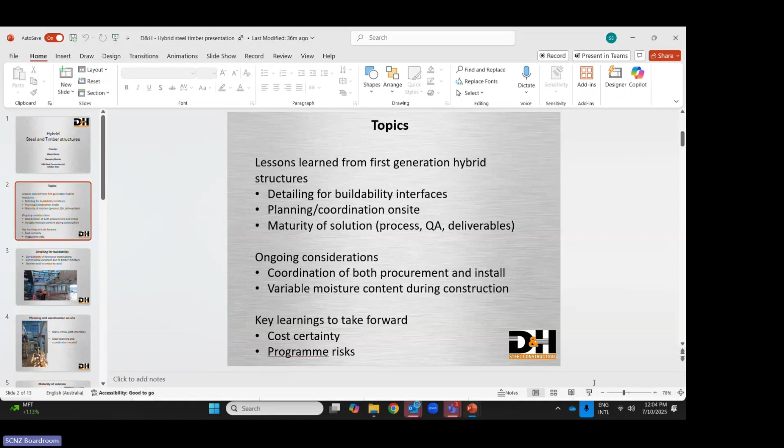So I'm going to touch on some of these areas - lessons learned from first generation. I'll talk about buildability, interfaces, something about planning on site. I'm going to touch on some learnings around the maturity of the industry and where we're heading, a bit about coordination, and looking forward at some ongoing considerations. Moisture content is one of those, and how do we take these key learnings forward.

Compatibility of expectations was and is one of the big things. It really needs careful consideration when planning a project, and more particularly as you're detailing. There are quite significant differences in that expectation, so it needs to be clear, talked about and discussed on how to deal with it. One of the things we've found - and I'm going to show you three examples of projects we've been involved in - is a key difference in dimensional variance that occurs through weather, particularly moisture, which translates into trying to come up with good buildable details that allow for a bit of variance and a changing variance.

One of the things we've seen change quite a lot is a bit of a demarcation between what we describe as steel-to-steel connections versus timber-to-steel connections.

Some of the manufacturers now are offering some of those connections as part of their timber package. It's different from different manufacturers, but some now supply their own timber to timber connections.

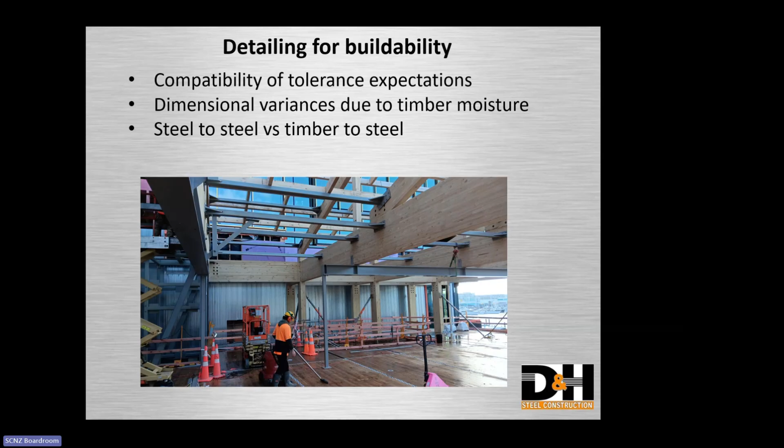So it's about understanding that at the start, who's designing which elements and more particularly who's detailing each of those interfaces - timber to timber, steel to steel, timber to steel. These are the three generic areas that really need a lot of thought from a detailing and buildability perspective.

Along with that is the planning and coordination for on-site activities. Each of the projects we've been involved in has had many critical path interfaces. They're all true hybrids - even though they may appear to be largely a timber building, there is still a high content of steel elements and components, so all of those interfaces need careful consideration.

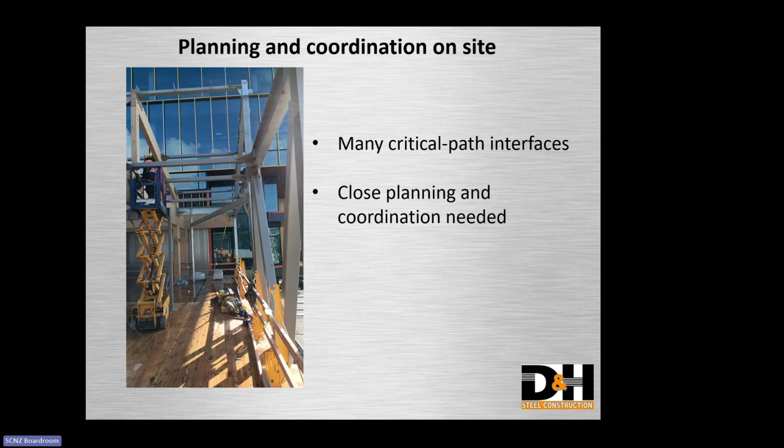From a construction perspective, and certainly a main contractor's perspective, where he's herding the sheep if you like, it needs close planning and careful coordination. Most projects ended up with various tools to deal with that - the starting point being potentially a color-coded set of drawings that clearly defines which manufacturer or contractor is supplying and installing the steel components and the timber components.

Some lessons learned that have been reoccurring is there's a maturing of these solutions, and one thing we've noticed as a significant step ahead is timber manufacturers becoming contractors. In other words, more and more they're offering added value - not only supply of timber elements, but also in some cases supply of connections and in some cases also erecting the structure.

I can say with pride that our steel industry is quite a mature industry, so there are very clear processes that follow. So there are some challenges to get onto the same page around how we deal with control, change management and control.

I know especially changes through detailing. The detail that I've circled in that picture was one that from a steel perspective, we weren't aware it even occurred. So there's a bit of a mismatch there on expectations of what we were each building.

I say eyes open because you actually need to be really holding hands. There are things that one party might not think are so important and yet might be critical to the other. So it's very much a team effort, and clear, concise communication is just key.

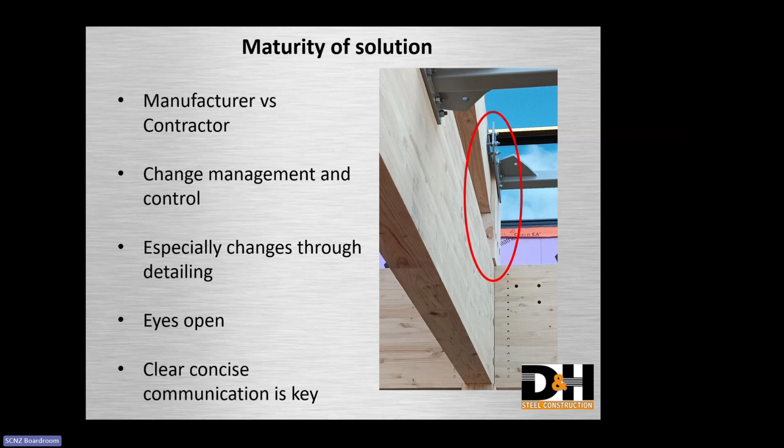Once there's a set of design documents there, having those demarcations and the clear scope and expectations is what I mentioned - clear scope, definition, demarcation, that's really, really important. And we've got a much better feel of how that looks now.

Part of the consideration around this - how do you pull two primary structural members or materials together - is the whole thing around lead times, different deliveries, different phases, using the same terminology.

There's very different skill sets needed for the two components, steel versus timber. And what we've found on many of these hybrid projects, you actually need both on site most of the time. They're so connected and interconnected that you need those resources available to ensure a streamlined, flowing construction sequence and process.

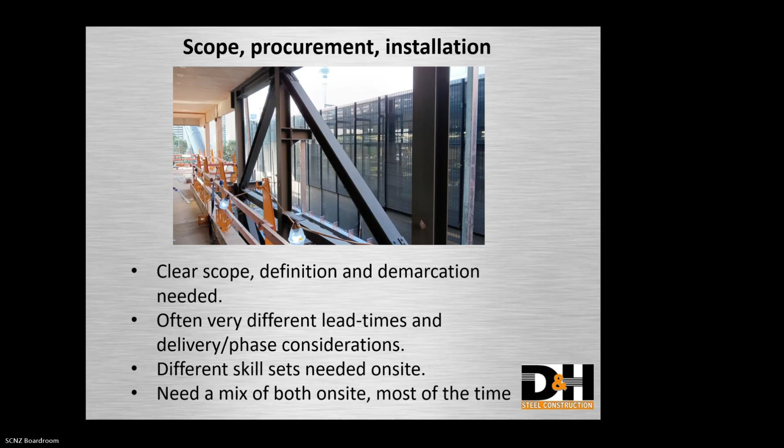One of the things we've learned a lot about is moisture content and how that affects timber on site, and also much greater appreciation that it changes quickly with weather. So it's imperative that some of the connections, if there's a consideration around moisture content, have a limitation before certain things can happen.

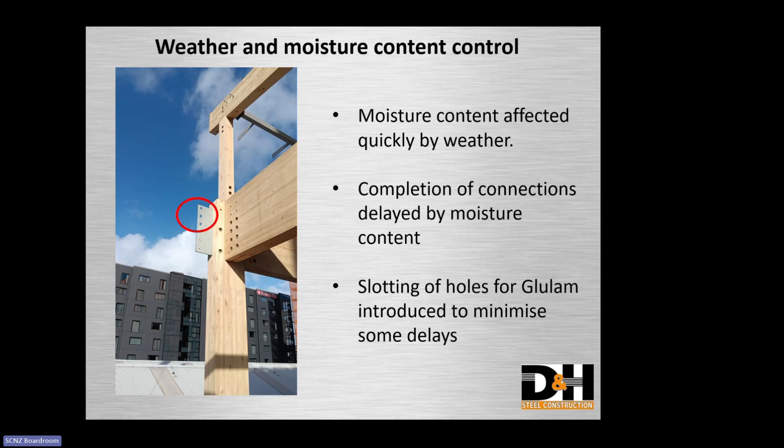For instance, the connection I've circled there couldn't be done unless the timber was within a certain moisture content. So partway through the job, they introduced slotted holes just to try and make that less of a critical hold point. So some of those things are really important to understand at the beginning of the project, because the critical nature with which the two trades work together, it needs to be seamless and trouble-free.

So I'm just going to quickly touch on 3 examples. This building, all of these have been constructed. In this building, the coloured items are steel. I did a bit of a cross-check around how that looked from a project perspective. The steel cost there equated to about $110 a square metre, which is a pretty significant cost. Even though it doesn't look like there's many members, there's quite a bit of detail in it.

At the beginning of any of these concepts and projects, I think it's really important everyone has their eyes open and expectations clear, because as we all know, budget and budget constraints are critical, and no one likes surprises. So these things are now becoming much more predictable and expected, and therefore better quality budgeting, having that knowledge.

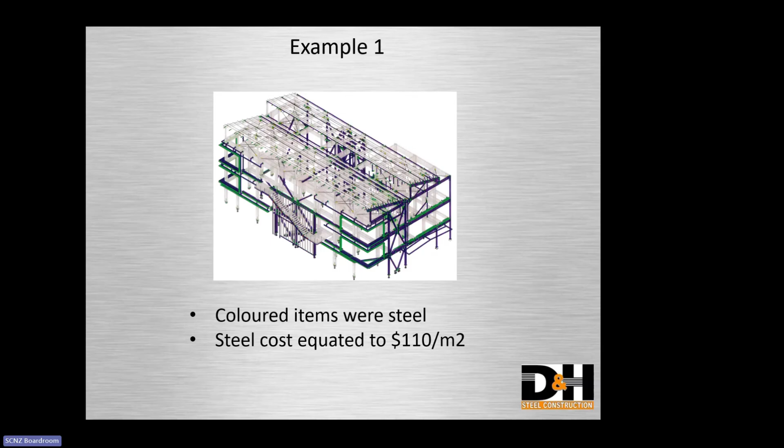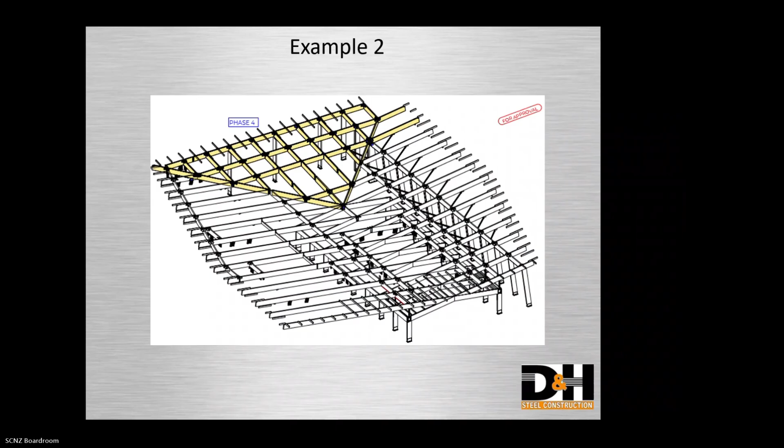This is another example. Actually, all of the members you see there are timber, largely, predominantly timber. And these are the things you can't see. In this case, it had extremely complex steel connections, very expensive details to fabricate, and just the critical nature of how everything fits up. They needed very, very high quality fabrication to fit up on site. So as a consequence, very expensive.

Now, this is first generation. Things have moved on. I think people now appreciate that there is this hidden cost that might not be apparent at the beginning. So there's a much greater awareness around more efficient connection details, avoiding this kind of extremely expensive component items.

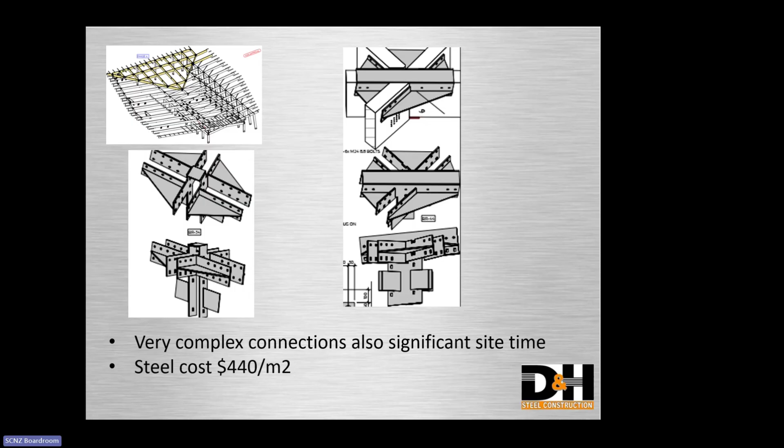This is the third one. Again, a real project, a little bit different because it's quite a special area. It's big, wide span trusses, a big open area. It had a very significant amount of steel in it, also a significant amount of timber. So it was a true hybrid.

Again, I think everyone was a little surprised at the final cost, and when you start trying to boil it down, in this case, it had substantial steel supporting the timber, even though now if you look at it, it appears to be a solid timber building. So I think there's a few lessons learned out of this one, that that's potentially not the right mix.

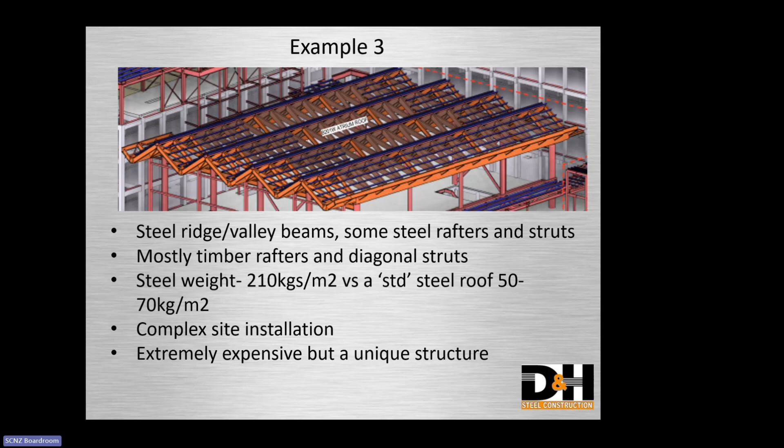So just to try and summarize quickly, first generation hybrids have provided some clarity on the pros and cons and the best combinations of materials. I think one of the recognitions we have as a steel industry is that it's very much about using the best material for the application and the use, and timber definitely has a place in the market. Our role is to try and assist where we can in making that a really good solution.

Risk is much better understood. I think we're kind of 5, 6, 8 years down the track now, and there's much greater clarity around how a hybrid building will look and how it can be built, which leads to much greater certainty on cost and programs. And clearly there's been development, and there's certainly improvements and more cost-effective low carbon hybrid solutions are evolving, which is what Alistair's going to be pointing to in terms of one consideration.

So those are the key points we've taken from it. The market is certainly moving ahead. There's absolutely, hybrid construction is here to stay. So it's about trying to make sure that you use the optimum pros and cons to get that best mix.

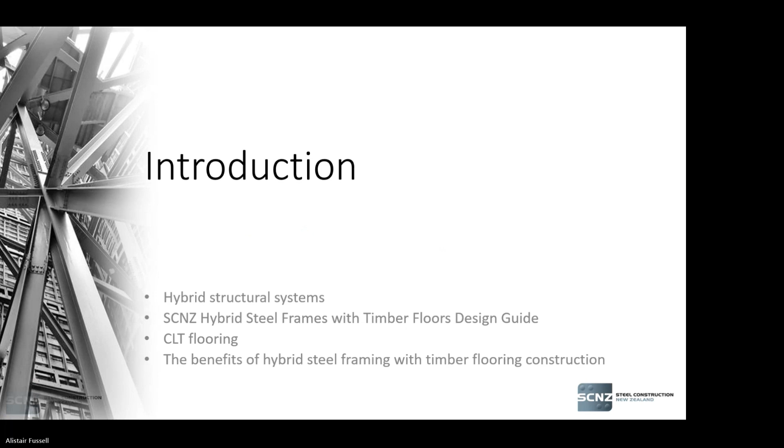Ah, there it is. Okay, so in terms of introduction, when we talk about hybrid structural systems, it's a bit of a generic term. Essentially, we're talking about combining one or two or more construction materials, and what we're trying to do is optimize the strength of each material to come up with an efficient and, particularly these days, a sustainable system.

So with timber and steel, we might be trying to take advantage of the strength and stiffness of a steel member while getting the aesthetic values of a timber floor, and also the advantages of the reduced weight of the floor.

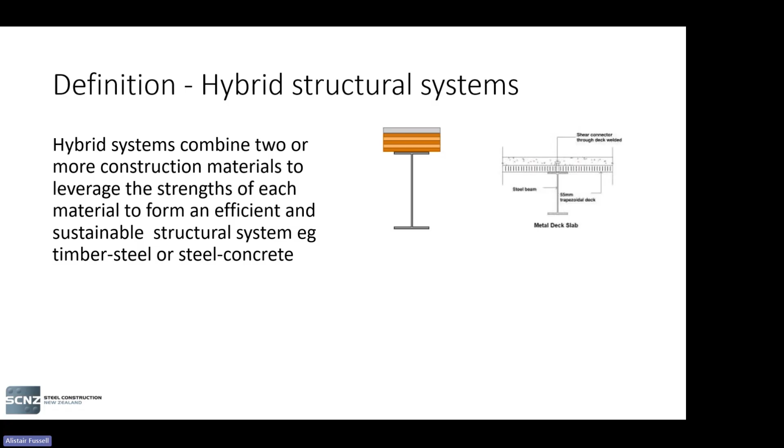With a steel concrete composite floor, what we're trying to do is take advantage of the fact that steel's very good in tension and concrete's good in compression, and if we put the two together, we can come up with an efficient floor.

Darren's mentioned that we're currently developing a new design guide called Hybrid Steel Frames with Timber Flooring. The typology we're covering here, and Wayne's already alluded to this, is that when we talk about hybrid timber and steel, there's lots of different options. You can have timber floors, beams and columns, but only steel braces in the building. As Wayne has shown with some of the jobs, there's a mixture of steel and a mixture of elements in it.

So the typology we're covering in this guide, which we think is a practical form of hybrid construction, involves having a structural steel skeleton - your beams, your columns, your braces - and you put a timber floor on top of the steel. We think this is a practical way to decarbonize construction, and as we'll discuss, it can be a cost-effective and efficient way of building.

The design guide we're developing - we're grateful to the American Institute of Steel Construction. They developed Design Guide 37, and they've given us permission to use their guide as a basis for our own. Obviously things are a bit different in New Zealand, so we've had to rework it for our own context. We have different building regulations, different codes, material codes, loading standards, and the building practice in this country is different than it is in the US.

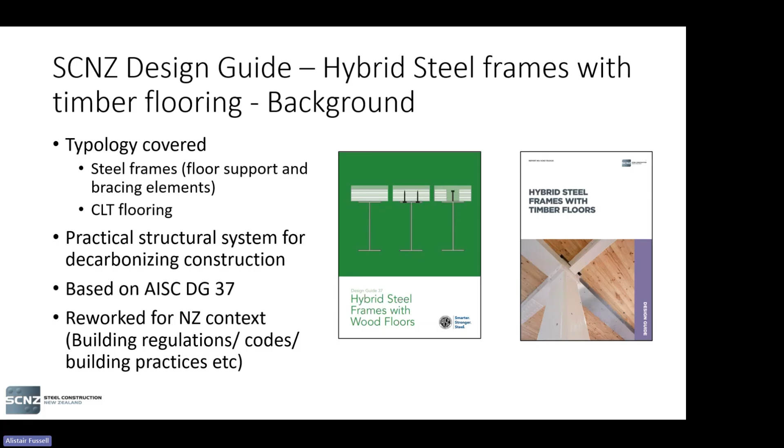So in terms of the guide, why did we develop it? Firstly, we really wanted to try and facilitate the adoption of this type of building typology. So what we're trying to do is help designers who perhaps are more experienced with structural steel design than hybrid construction, putting front and center the matters they need to give consideration to, particularly up front, if they want their designs to go well.

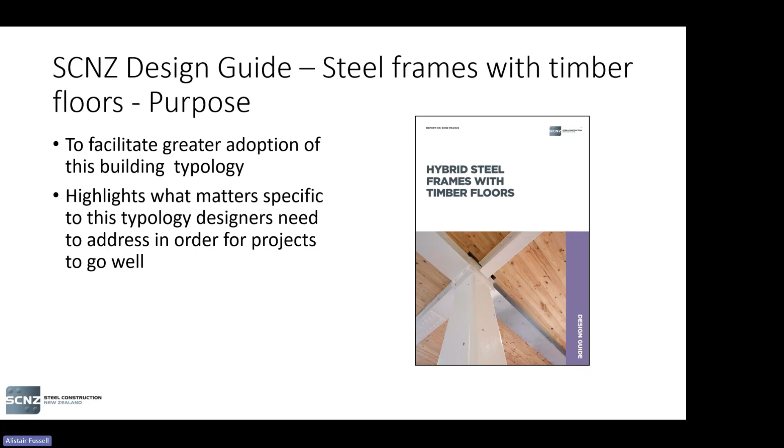In terms of its development, we began our journey of developing this guide earlier this year. We've engaged a range of consultants with specialist expertise to help us develop our guide - structural and fire engineers, acoustics people, sustainability experts. We've convened an expert panel of structural and fire engineers who've already undertaken a review of the first draft. The game plan is that, all things going well, probably the middle of next year we should be publishing this guide.

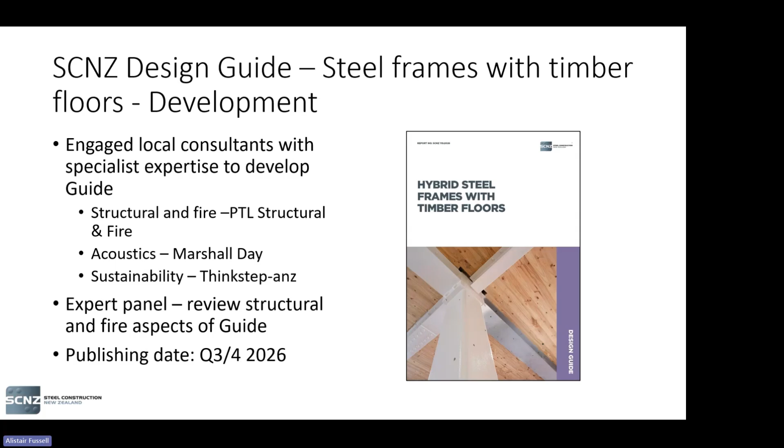In terms of this guide, this gives you a bit of an idea of the content. We give a bit of an introduction to mass timber construction, and talk about hybrid steel frames with timber floors, giving some examples with case studies we've developed. We're also talking about some of the advantages of this type of construction. We focus on structural design, and one of the really important areas of designing one of these mass timber floors is the design of them as a diaphragm, which we'll talk more about as we go on. Fire is an important consideration, which we cover in good depth as well.

Acoustics, sustainability, and we've also got input from builders and fabricators who've got some experience with hybrid construction, sharing some of the learnings from their experience of this type of construction.

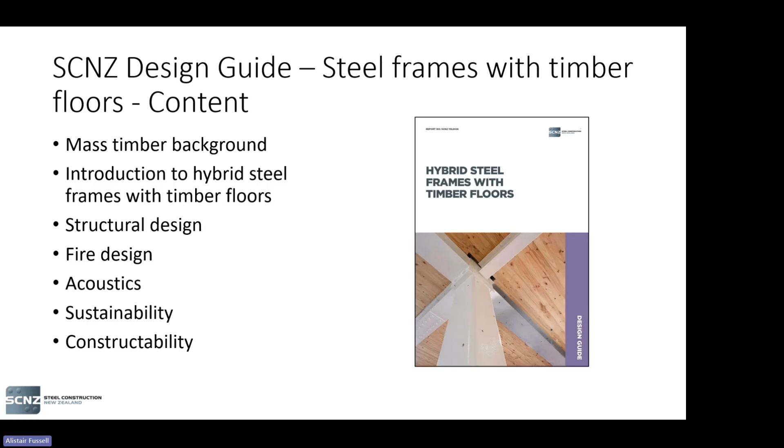When we talk about hybrid construction using timber floors, what we have in mind with this guide is the use of cross-laminated timber panels. These are panels made up of a number of plies.

They come in different configurations. You can get them in 3-ply, 5-ply, 7-ply, and different manufacturers come up with their own thicknesses of these plies. So even for a given number of plies, you can end up with a range of panel thicknesses. A 3-ply can span up to 4 meters, and once you get to 7-ply, they can span between 5 and 7 meters.

I suspect that won't be a practical limit - floor vibration would start to become an issue if you were pushing them out that far. But in theory, that's how far they can span.

One of the features of a cross-laminated panel is that the plies are orientated at 90 degrees, alternating direction, so they tend to have strength or spanning capability in 2 directions. They can be made in quite long lengths, between 12 and 18 meters, and up to between 2 and 3.5 meters wide. So really you're more limited by transportation - generally, once you get beyond 18 meters or just over 3 meters wide, you'll need a pilot escort for your vehicle to transport these.

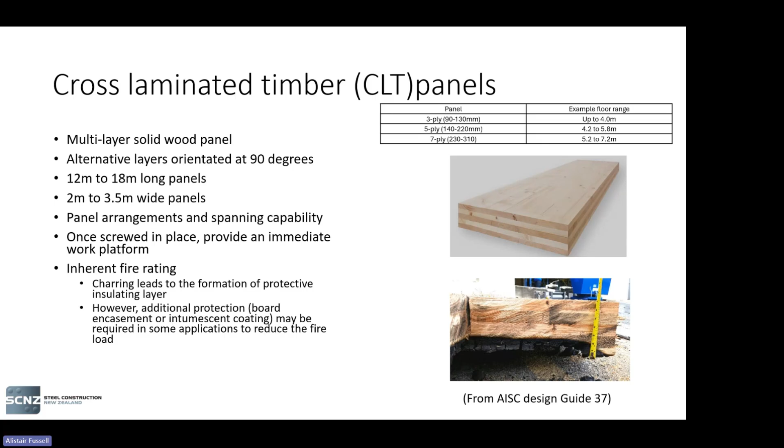So what I want to do now is just touch on some of the reasons or the benefits of this type of typology that we're talking about in the guide, why we think it's a good solution.

The first one is aesthetics, and I'm sure I'm preaching to the choir here with architects. You're well aware there's a growing interest in biophilic design, and the way we're seeing that is more natural elements being incorporated into the built environment, with timber being a significant part of that.

One of the things you can do with this type of floor, as you can see in the example here on the right, is actually expose the floor panels and the steel beams with minimal additional architectural finishing. You might just need to give your steelwork a nice coat of paint, and think a little bit about how you treat your surfaces so it looks like there's some thought gone into the layout.

One of the big advantages of using steel beams is the spanning capability - you can easily get 8, 10, 12 meter long floor beams if you use steel. Conversely, if you're going to use timber beams, mass timber beam/post construction, they can become quite inefficient once you get spans greater than about 6 meters.

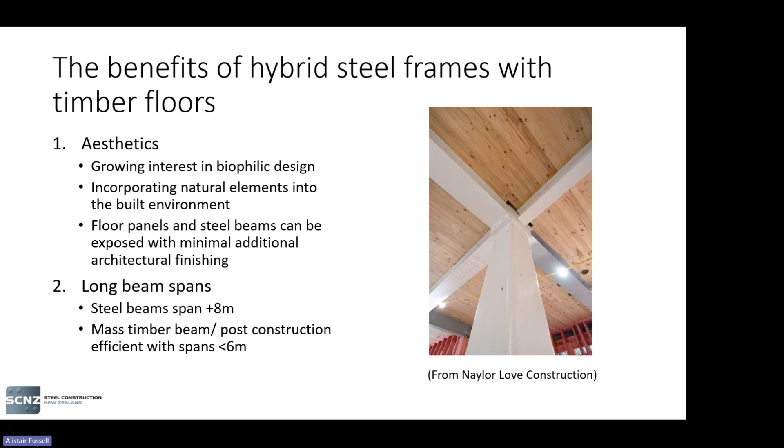This type of construction has sustainability benefits. The CLT panels obviously have low embodied carbon, and the structural steel also has a good sustainability story.

We're seeing increasing adaptive reuse of buildings. Often buildings become functionally obsolete long before they need replacing or demolishing because of deterioration. So when you use a structural steel building with long spans, it gives greater flexibility if there's a change of use. Also, structural steel buildings can be readily strengthened if you want to change the floor loading or add extra floors.

It's relatively easy to weld or bolt new structure to an existing structure. Steel is also readily reusable, so essentially a steel building is a spare parts warehouse for the next steel building, and there are initiatives now to help facilitate that in the future, in the next 100 years or so, when these buildings come to the end of their life.

One of these initiatives is the Steel Passport. This is where they're developing systems to capture information about the steel that's gone into the building—its grade, its mechanical properties, what coatings were put on it, and its sustainability properties—so that in the future it's available to be sold and reused.

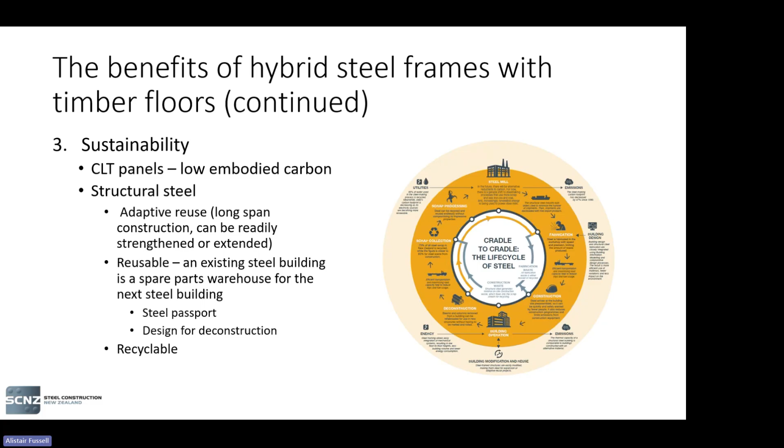The final aspect of structural steel sustainability is that, unlike a lot of other materials, once you get to the end of life of the structure, there's a ready market for scrap metal. There's a very high recycling rate with structural steel, and it has good commercial value. It's used again in electric arc furnace steelmaking processes to create new steel, which has a much lower embodied carbon value than creating steel from virgin iron.

One of the other big benefits of using structural steel beams is it's much easier to integrate services into the depth of the beam. With structural steel, you can put pretty large penetrations into the webs of the beam—you can see an example from one of our case studies with circular penetrations. If you have to pass services under the beam rather than through it, you end up with increased floor depths, which increases the height of the structure and the amount of facade you have to put on the building.

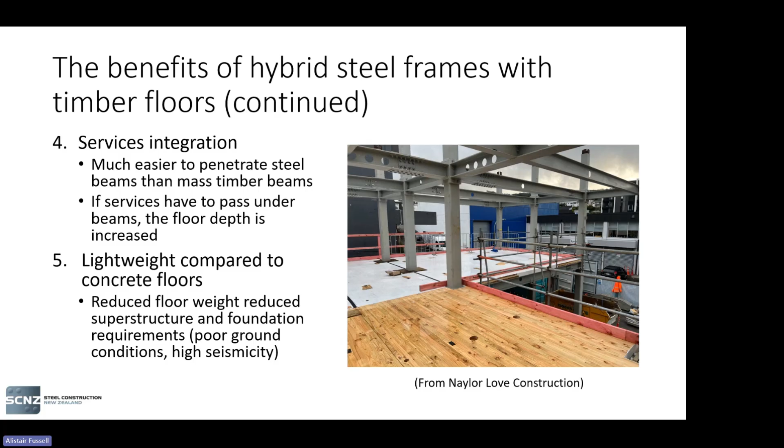Another plus of this type of construction is that a timber floor is quite lightweight compared to a concrete floor. If you can reduce the weight of your superstructure, the requirements for your beams, columns, foundations, and lateral load resisting systems are reduced. This has big advantages if you've got poor ground conditions where foundation work is expensive, or if you're in a region of high seismicity, where extra structural weight is a liability as your earthquake loads will be a lot higher.

You also get the benefits of construction efficiency. CLT panels and structural steelwork are prefabricated systems, both manufactured in factories using automated equipment. They use 3D modeling, which gives the inputs into computer-controlled CNC equipment, so you get all those efficiencies.

When you set yourself up in a factory, it's easier to control the environment to get the quality you require. You can set things up so it's more efficient, and you can do it not only easier but safer in a factory than on a construction site. Once the fabricated product gets to site, it's very quick and easy to erect.

CLT offers significant construction efficiencies compared to a traditional floor. Imagine dropping in an 18-meter long panel that's 3 meters wide—that's a lot of floor area covered in a very small time. If you were to replace that with timber joists at 400 or 600 centers, adding blocking, flooring, and screwing it down, it's way quicker to just drop the panel in.

Structural steelwork is just like a giant Meccano set. The steelwork comes to site either as individual members or as fabricated components, and it's bolted together on site. These days we don't get much site welding, so it's a very quick process.

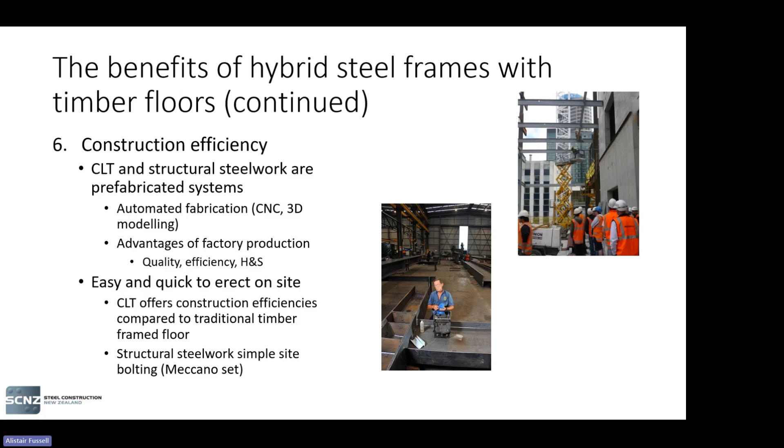So that's really just a bit of an introduction to our guide and to the hybrid typology that we're suggesting has a lot of merits, and we're encouraging designers to think about utilizing it. What I want to do now is go through some of our case studies, share with you some of the drivers for those projects, why they decided to use the typology they did, and also share some of the challenges or lessons they've taken from their first experience of this type of construction. Before I start, I want to acknowledge the engineers and the builders who helped us with these case studies, not only sharing information but also images and drawings of these projects.

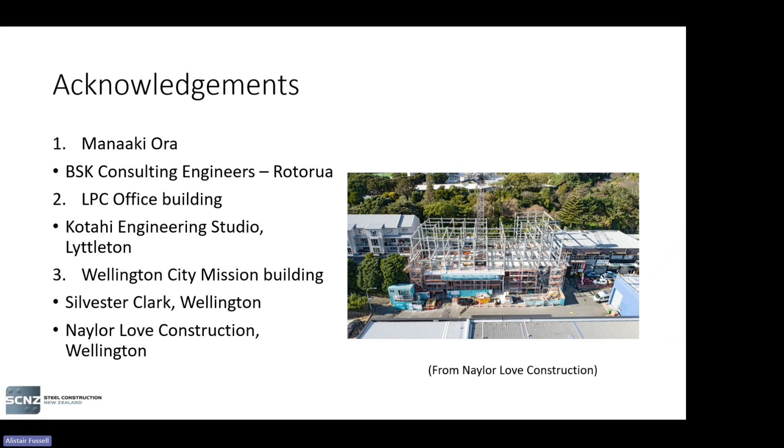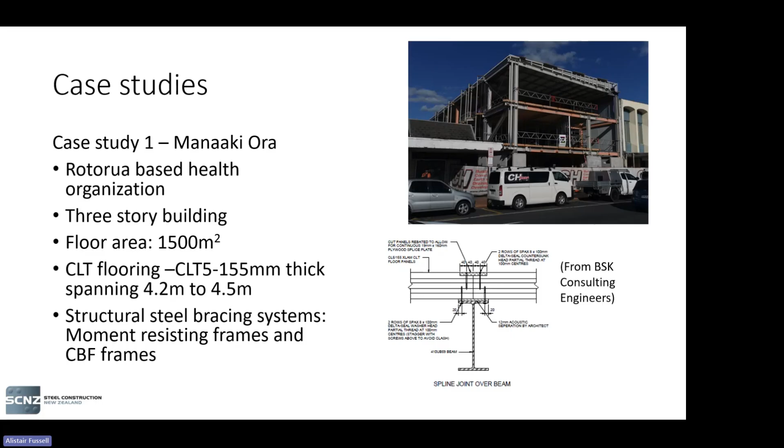So the first case study is the Manaaki Ora project in Rotorua. This was for a Rotorua-based health organisation, a 3-story building with a floor area of 1,500 square metres. They had a 5-ply floor, 155 millimetres thick. The structural bracing system, as you can see in the picture, had concentrically braced frames running down the side of the building, and steel moment frames in the cross direction. The CLT flooring was supported on top of the steelwork - you can see in the diagram a cross-section through the beam and floor, showing spline joints over the beam. They also used half lap splices in the middle of the floor, which I haven't included in this diagram.

In terms of the drivers for choosing a hybrid structure: it was a challenging site, with difficult geotechnical and geothermal conditions. So it was a big plus to be able to reduce the weight of the structure and make things easier for themselves. They were keen to use a natural product in the floor, and wanted the construction efficiencies of a prefabricated element, as opposed to constructing a traditional timber floor. They really liked the idea of combining the warmth of wood with the strength of structural steel.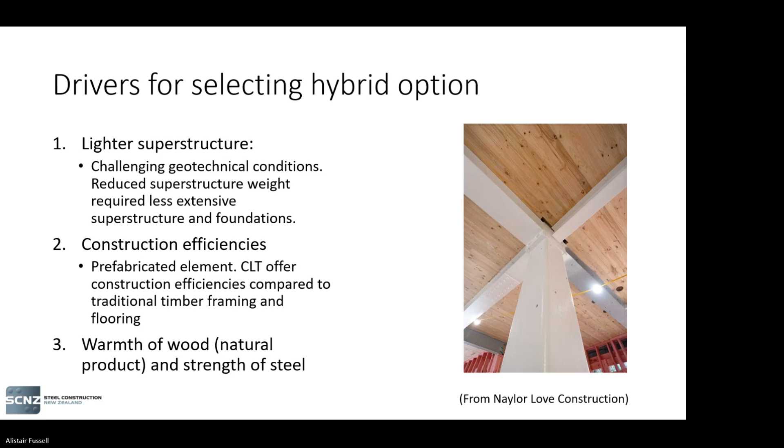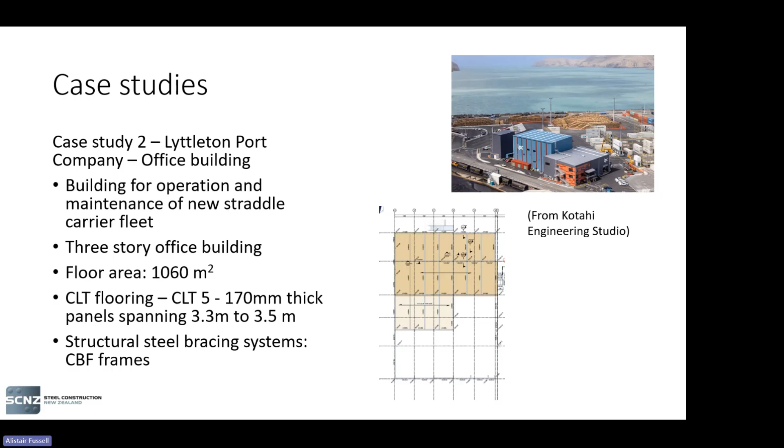The second case study is an office building for the Lyttelton Port Company. They were building a new operations and maintenance building for their new straddle carriers, which could now lift and place containers 4 high instead of 3. So they were getting greater capability without needing new land, and needed a new building to service that. They also constructed a 3-story office building, just over 1,000 square metres, with a 5-ply floor. In this case, they had concentrically braced frames as the primary lateral load resisting system.

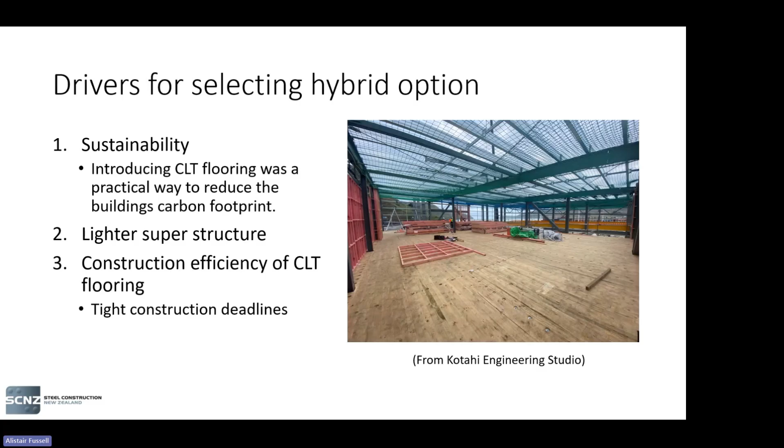So why did they choose a hybrid option? The port company was keen, as part of their sustainability agenda, to reduce the carbon footprint of their building while coming up with something practical to build. The reduced weight of the structure made a difference to the design, and they were keen on the construction efficiency of CLT. Like most projects, they had tight construction deadlines, and they felt this would offer that advantage.

The third case study was from Wellington - the Wellington City Mission project. This was a community facility serving a number of functions, a 5-story building, bigger than the other projects at over 5,000 square metres. It included a 5-ply CLT floor, but unlike the others which used brace elements, this used a 2-way moment frame. Part of the reason for this was that brace frames had quite high uplift loads, making it difficult to design the foundations. So the 2-way moment frame really suited their project.

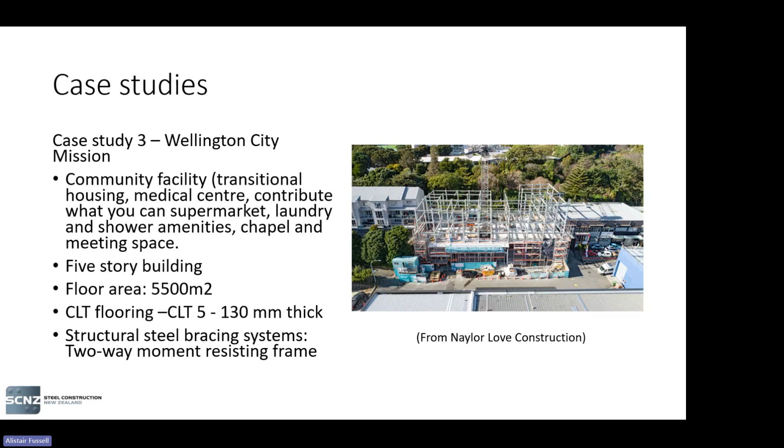The reason they went for this hybrid option was that the timeframes were really tight on this project. When they first started, they had a few buildings they were going to upgrade and do some refurbishment work on. Very soon it became apparent to the designers and owners that there would still be a lot of limitations even after this upgrade work, and they probably weren't going to get a great outcome. So they ended up pivoting to a new build.

They had secured government funding under the Shovel Ready program, but they had to start by a fixed date to get the funding. And to avoid a new resource consent, the building had to stay within the consented envelope. The structural engineers had to come up with a new structural system that would work within the confines of the developed architectural layout, because that wasn't going to change anymore.

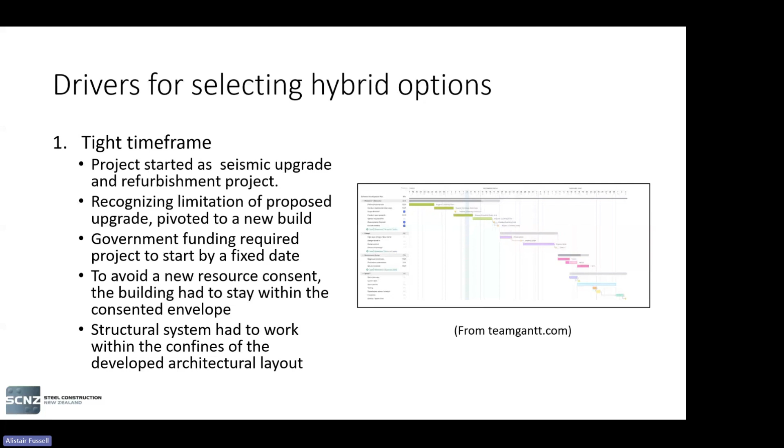The other driver was construction efficiency, which came down to this tight timeframe - they liked the advantage of a CLT floor. Weight was also important, as it was going to be tricky to make the foundations work with a heavy structure. The other big plus was that the steel beams were a lot shallower than they would have been as a mass timber beam, which was really important for keeping the building within the envelope they had a resource consent for.

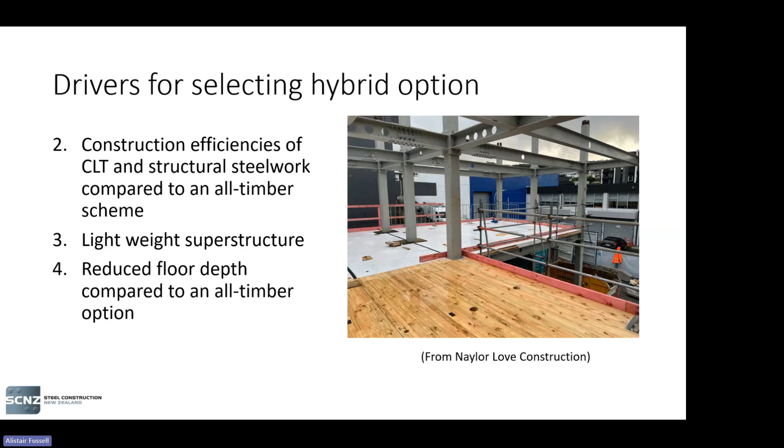Now I'd like to draw out some of the lessons that this first generation of designers has learned from their experience with these types of buildings. I've essentially morphed them all into one - I'm not going to list them by building. Some of these came up in all of them, some might have only come up for one project, so I've just selected a group of them.

The first lesson was that they certainly recommended the use of a federated building model - a combined model of the structural steelwork, the CLT panels, and your building services. What they're saying is that it's much easier to build a digital building and detect your clashes rather than send the job to site and find problems. You lose a lot of the advantages of prefabricating your building if you find on site that you have to retrofit where you've got a problem.

You might have overlooked that you had, for example, some connections on top of the steel flange and you didn't route the panel. If you're craning a panel into position and suddenly find you have a problem, you've got all the delays of having to site route, plus the hook time and everything. So you really want to try and sort it all out in your model before you even get to site.

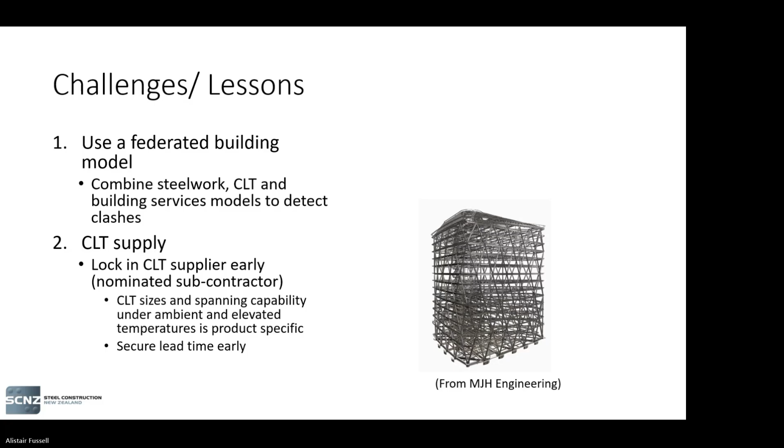Fireproofing is obviously important for all types of construction, but there are particular issues to consider with mass timber and hybrid structures. One designer rightfully noted that the behavior of hybrid buildings in fire is an evolving science, so you really want to get your fire engineer involved early.

One of the key things you have to do with these types of floors is prevent heat and smoke transfer through the floor. Now this is a bit more tricky when you don't have a concrete topping. In the US they do put concrete toppings on floors, so you don't have the same issues of having to be so careful in preventing smoke and heat transferring through the floor.

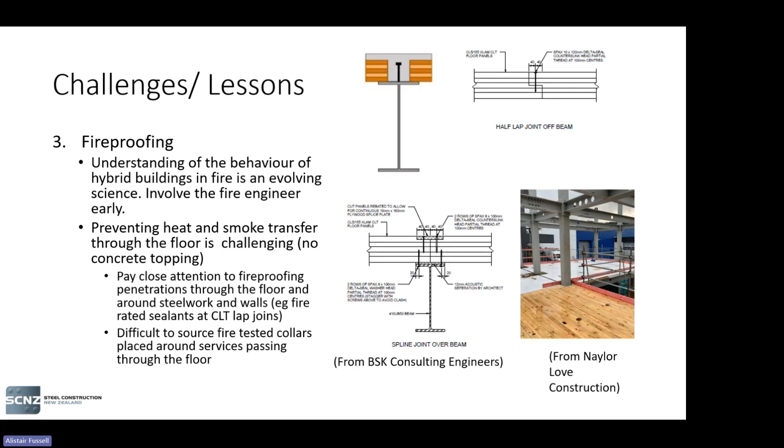So all the joins with the CLT floor had to have fire rated sealants in them. They needed to have fire rated collars go around the services penetrations through the floor. One of the engineers reported that it was difficult to get fire-tested collars to pass through the timber floor. I don't know if that's changed, but that's just something to be mindful of.

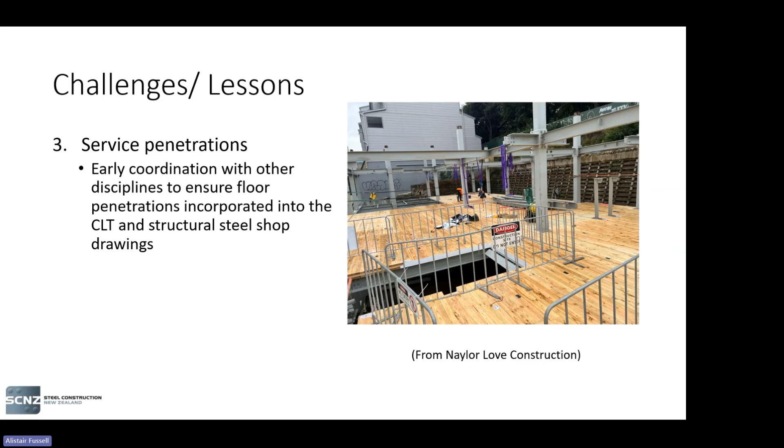The other lesson there is around service penetrations, and really the lesson is that you need to get early coordination with particularly the services engineers to make sure that the floor penetrations are incorporated into the floor, and beam penetrations are incorporated into your shop drawings. It's so much easier to put the service penetrations on in the factory than it is to retrofit and have to put penetrations into your structure on site.

The building code has requirements around the transmission of airborne and impact sound transmission, and so really one of the requirements there is that you have to resolve your acoustic issues early. You have to recognise that some form of acoustic separation layer between your floor and your steelwork, or some sort of floating floor, is going to be required.

And then obviously this has structural and architectural implications. You add these floating floors, you add seismic weight, you increase the floor depth, that changes your floor-to-floor heights, and there's obviously careful detailing required to make sure you don't get sound transmitting around through the structure into other spaces.

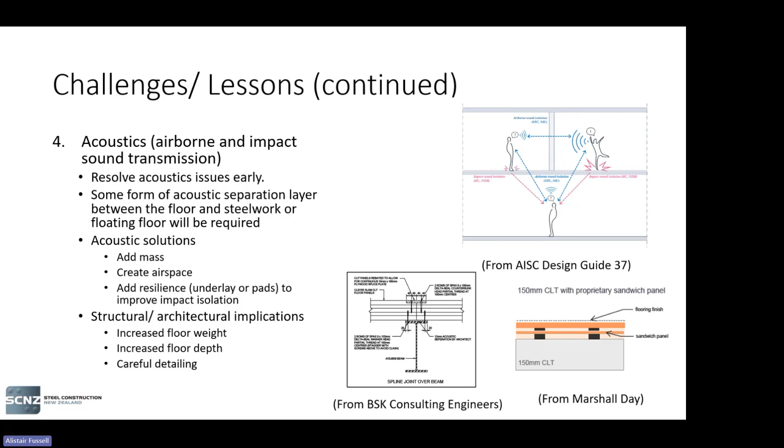Wayne's touched on this one. Moisture management is really important. The structural timber, you're trying to keep it below 18% water content. Once you get above that water content, the timber starts to swell, being a natural material. Not only does it swell, which creates tolerance issues as Wayne's already alluded to, it can also result in staining. If you get water on it, you can get mold growing on it. So really the very clear message there is about protecting your floor from moisture.

So some people have tried shrink wrapping their building. Other times they individually wrap their CLT panels in plastic. So they either wrap it in the factory or they use adhesive wrappings that they put on site once the floor's been laid.

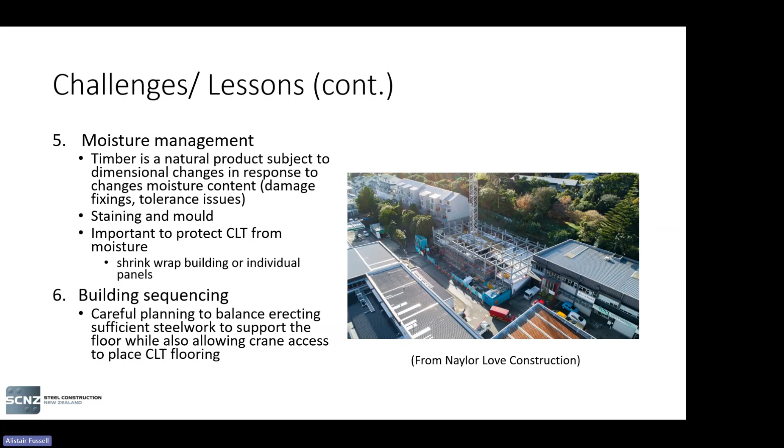Another lesson, and this came from the builders, is around building sequencing. You've got to be really careful in planning your erection because you've got to balance things. On one hand, structural steel typically gets put up in 3 to 4 story lifts, which makes it quite efficient, so you really want to get as much structure in place as you can. But on the other hand, you don't want to snooker yourself by not being able to get the timber floors back through the structure to lay them on the structural steel. So you've really got to think very carefully about what structure you put up, what elements you leave out, in order to allow the panels to be craned into position.

One of the things that is a bit more limited about a timber diaphragm or floor diaphragm is that they're not as strong and as stiff as a concrete floor. So your floor in a building not only has to resist vertical loading from the contents of the floor and its own self-weight, but it also has to transfer horizontal loading to the vertical braced element.

This horizontal loading could be wind applied to the side of a building or earthquake loading, so it has to distribute those loads horizontally to the bracing elements, which could be moment resisting frames or some sort of braced frame.

If you have widely spaced braces, it can actually be quite hard to make a timber diaphragm work by the time you're trying to design to resist all these horizontal loads, and you can end up with complicated diaphragms which aren't very practical to build. So really the lesson is it's better to use CLT floors when you either have lower seismicity, so your lateral loads aren't as large, or you try to avoid having too widely spaced vertical load resisting elements. The system that works really well with it is steel moment frames, where you generally have quite closely spaced moment frames in a steel building, so the demand on the CLT flooring diaphragm isn't very high.

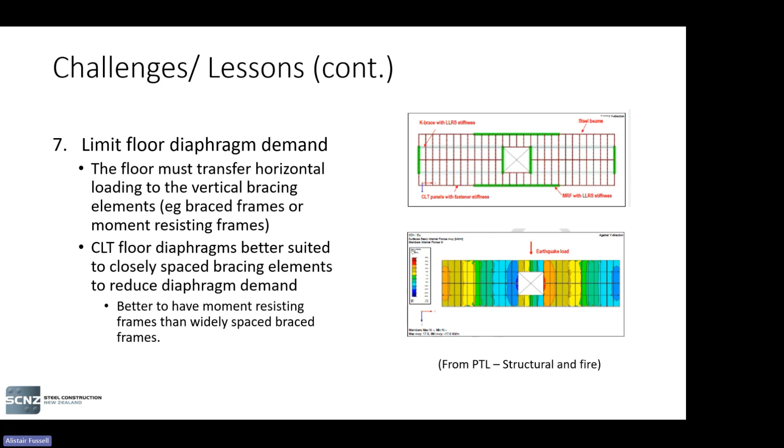So now I'd just like to draw the threads together of what we've said. We think that this form of hybrid construction of steel frames with timber floor really combines the best of wood and the strengths of steel. So you get the warmth of the timber, the strength of steel, and we think it is actually a practical way of reducing the carbon footprint.

The reason we think it's practical is that these types of buildings can be cost effective and an efficient form of construction, but there is a caveat to that: if you want to realize those cost and time benefits of this form of construction, you have to make sure as designers that you have your design completed and coordinated up front.

With concrete type buildings, you can almost be putting penetrations in as the concrete truck's on the way to site for a pour - it's a lot easier to accommodate it. When you have prefabricated trades, it's so easy to put penetrations and account for things in the factory, but the moment you have to sort out a stuff up on site, it becomes very expensive and very time consuming.

So if you want good value out of it as designers, you have to do more work up front so that you pretty much have a locked and loaded design by the time it goes to shop drawing.

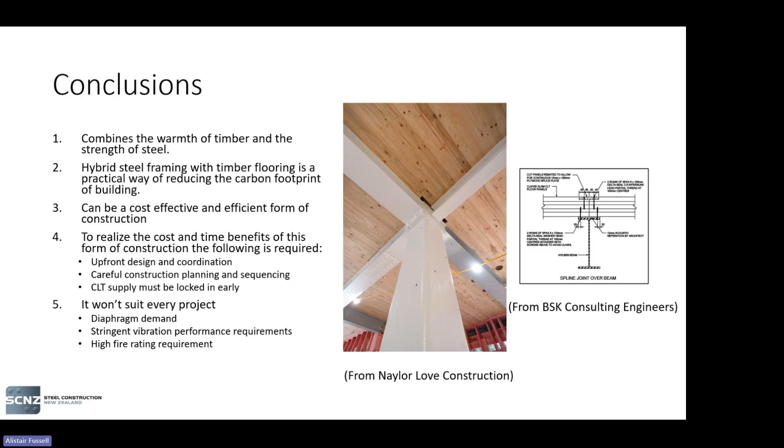And that's the end of my presentation.